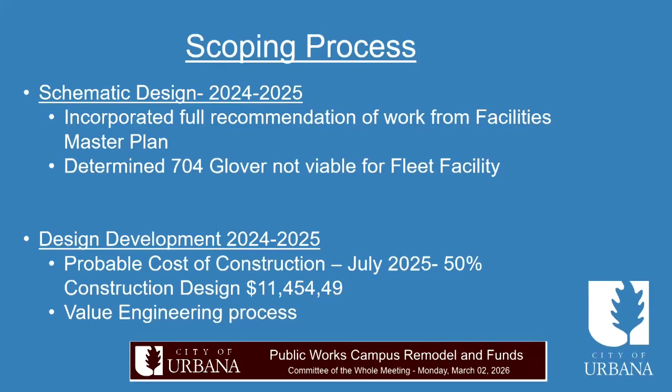So what's in the current scope of work in phase one is what we have funded and what we have released out for bid. This work includes a new fleet maintenance facility and a new operations vehicle and equipment bay, as well as addressing some critical deferred maintenance items that we're going to walk through here in a minute, and Troy's going to help me with that.

With that construction work done, it's set us in a position where we can come back and talk about funding the CIP in the capital improvement plan in the future, finding funding to move forward with additional recommendations, which include relocating the Arbor Division back to 704 Glover and the interior office spaces that I touched on earlier. Just to note, those will have to be part of future planning and budgeting discussions in the capital improvement plan when we come back.

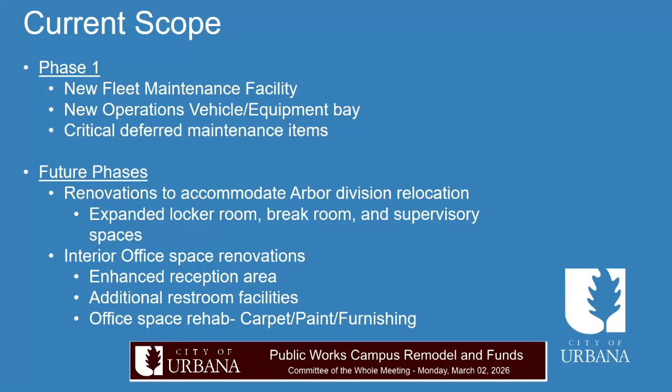So with that, I'm going to let Troy walk through the scope of work and what we plan to accomplish with the project.

Hi, thanks for having me. This is going to be an interesting approach to how we're going to do this since it's an existing facility.

You've got two halves there. The first three bays are the operations department, and the next four are the mechanics working area. It's going to be quite a bit larger than where we're at now. It's going to actually expand into our parking area for our employees, which is going to cause a little switch around in the way we have things laid out right now. But this is an overall plan.

Everything on the right-hand side shows the 4 bays for fleet. You've got 2 drive-throughs so they can pull fire engines and some of the bigger vehicles straight through. There's a couple of smaller bays for fleet vehicles that they can pull in with lifts.

They've got some work area in the center there for fabricating and tool benches. Basically, it's going to be a really good process for them to work on vehicles, pull things in, raise them all the way up with the wireless lifts that we have, and get the job done without being off-site. Right now we're kind of scattered between two buildings due to space needs, so we're trying to get everybody under one house so their tools and equipment, all the work gets done in a timely and efficient manner.

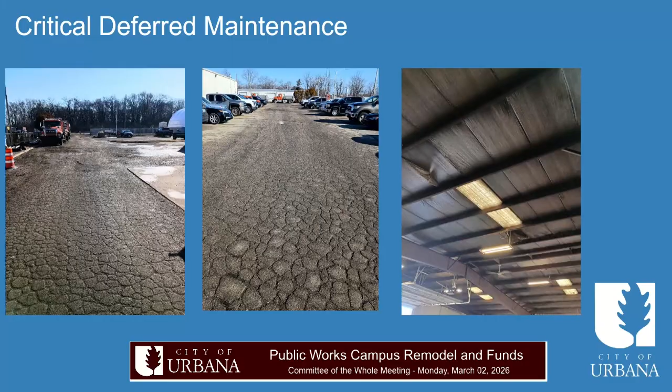The picture on the right shows the current structure that we're going to demolish, and you can see how the roof and insulation is saturated and leaking. It's just years of wear and tear and the deferred maintenance we were talking about earlier. We can't keep deferring that - we need to replace it.

That roof leaks, we've got interior problems with water getting in. It's just deferred maintenance we need to get done, so adding that to this project seemed very proactive - getting out in front of things we need to do anyhow.

We can't use it again - the new facility is just too big. We have to replace it.

One of the things this new facility is going to be equipped for is solar. So while that's not in the plan, our environmental manager is working with me to make sure the new setup will be equipped to have enough solar on it to power the entire facility. We're excited about that, but we still need a generator just in case the sun doesn't come up tomorrow.

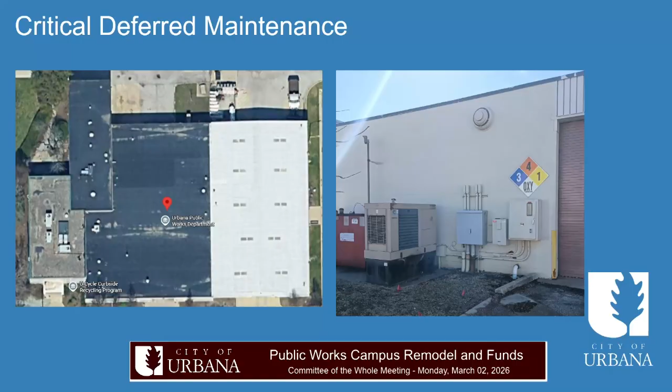So where we're at today - we released the scope of work I discussed in phase one for invitation to bid. In February we had five local contractors bid the job. The low bid started at $6.255 million, and the high bid was $7,080,000. On a project of this size and scope, we were pretty pleased with that tight grouping of bid pricing - it lets us know the plans were understandable, clear, and concise.

So we've reviewed the low apparent bidder, and it appears everything is in order. We're looking forward to executing a contract with them, hopefully within the next 30 to 60 days, but sooner rather than later.

The metal steel structure is kind of the limiting factor in that. The sooner we can get the contract awarded and get them certainty, they can get that pre-engineered steel metal building ordered and in the queue so we can meet our construction deadlines. With that, we're hopeful we could start as soon as mid to end of April, if we can get our contract awarded within the next two weeks.

Speaking to the budgetary considerations, as I mentioned, we had $6.5 million budgeted for construction in the capital replacement and improvement plan. With a base bid of $6.255 million, we've also added a $70,000 earmark for furnishings and fixtures - office furniture for the 2 new offices in the fleet space, hose reels, 2 air compressors, that sort of equipment. We've got itemized and listed for that.

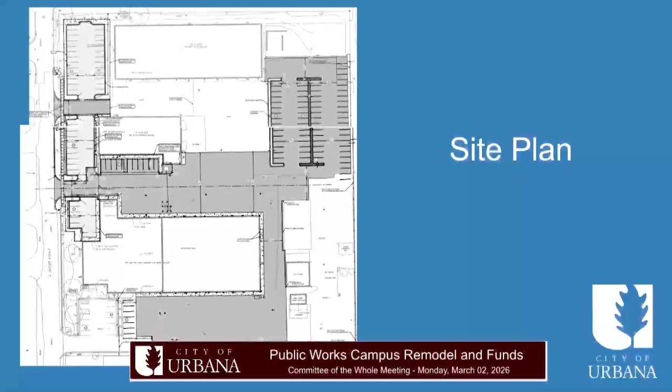Now we'll be able to park a truck in one specific location and still be able to use the remainder of the area, pulling vehicles in and out.

Okay, I just wanted to understand. I don't read these little schematics very well, so I wanted to understand—it's a lot of information in a small picture. Oh, yeah, glad to help. Okay, thank you.

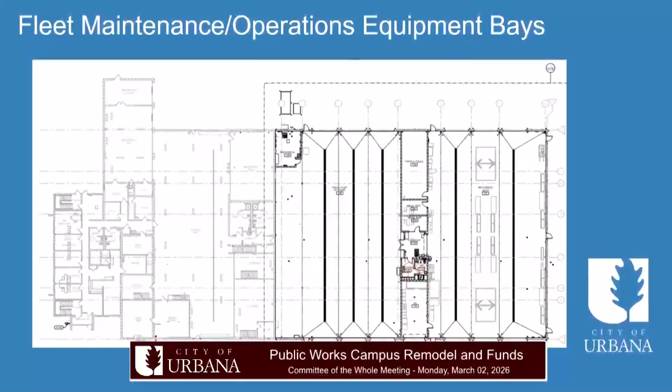All right, any other questions? Okay, I have a couple. Sure, I've been taking notes here.

So I think I heard you say that the addition of the bays is an additional 20,000 square feet. Is that correct? The entire new pre-engineered steel structure is 20,000 square feet.

And you mentioned that when it was scoped out again, it was about 11.5 million, roughly speaking. So is it safe to say it's another 6.5 million to do the other items not on that list? I'm wondering if there's a breakout, say for the Arbor Division, how much that would cost. It would be handy for us to know that breakdown.

Sure, absolutely. We could probably put that together and send what the original schematic design was and pull out those parts and pieces that aren't in phase one. But I would probably say from 6.2 to 11, probably another $4 to $5 million, which would be recaptured once fleet's completely out and in the new facility.

This area I'm outlining is a fleet bay and oil storage. We have a design to reconfigure a new break room area to accommodate all the new employees with new changing areas here, and upgrading our supervisor office area here.

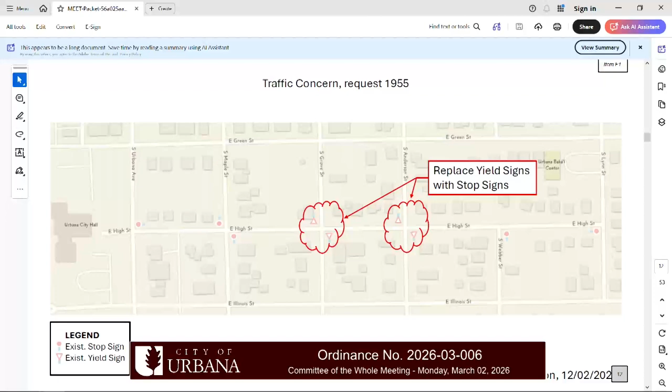Okay, other questions? I have a question. I'm quite familiar, I've lived on that street for many years. I don't anymore.

But are there other intersections in Urbana that have yield signs? There might be. John thought there were some in another neighborhood in Urbana, but we're not sure. These haven't been reported to us by our signs expert at Public Works. Recently, we made him aware that if he encounters any yield signs that need to be replaced, to bring those to engineering so that we can evaluate them to see if they would actually be better suited to have a stop sign in those areas. But I'm not aware of other yield signs, yeah.

Okay, so to the best of our knowledge, these are the only remaining yield signs in Urbana. Correct, to the best of my knowledge. Okay, all right. With that, I would entertain a motion.

Okay, I'll do it. I move that ordinance number 2026-03006, an ordinance amending Schedule H of Section 23-93 of Urbana Local Traffic Code requiring stop signs at certain intersections, Grove Street and Anderson Street at High, be moved to City Council.

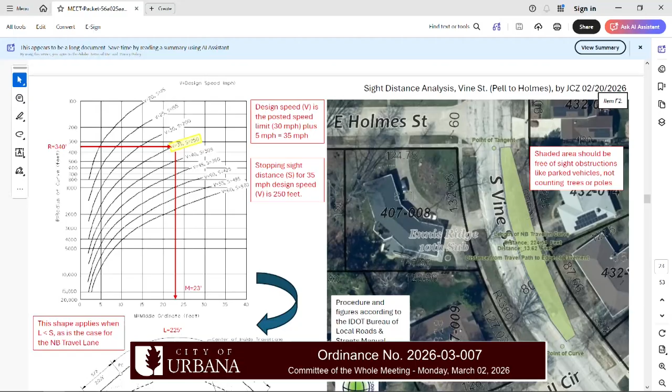So this is our curve for 35 miles per hour design speed of a road. We go on the vertical axis where our radius is at 340 and come over to our spot here, which brings us down to the horizontal axis, gives us a distance here, a middle ordinate distance in feet of 23 feet. And what this means is that we need to have 23 feet distance of clear space, so with no obstructions for sight, from the center of the travel lane to the shoulder edge.

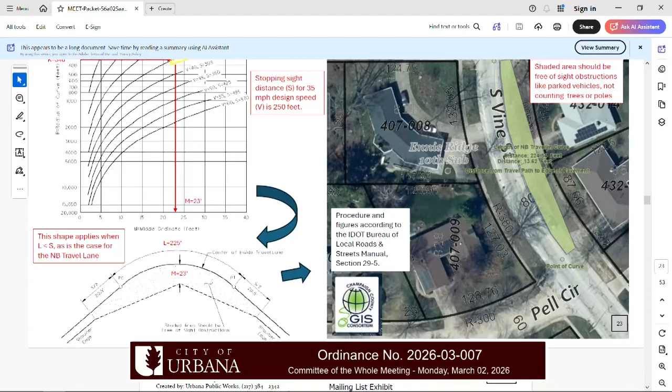Correct me if I get any of this wrong. The center of the travel lane is this line right here that I'm pointing at, and then the shoulder edge is here. So this translates to the width that John has drawn out here on our diagram. So this is the center of the travel lane, this line right here, and that length was determined on our curve to be 225 feet.

And that was used to dictate which graph was used in the manual. So that's why John noted this L less than S, L being the 225, S, the sight distance for this speed is 250. That's determined up here in our graph. Anyway, that's just to say that's why he used this specific graphic that's given in the manual.

So this tells you that we need to have this width here be at least 23 feet of clear distance. And in our case, it's measured to be about 14 feet here from the center of travel lane to the shoulder edge. So he drew out what the 23 feet would look like to show that this should be free of sight obstructions like parked vehicles, but not considering the trees or poles in the area.

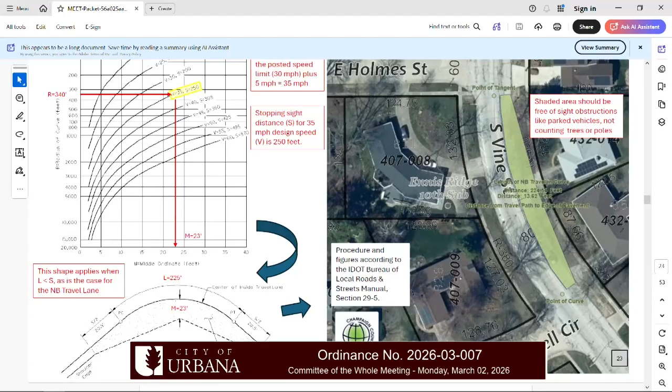Okay, so that is why this is proposed to add no parking to this zone right here from Holmes down to Pell Circle on the east side of the street.

Prohibiting the on-street parking on the east side of Vine Street from Holmes to George Huff is recommended to provide continuity in this area so we wouldn't have a gap in the no parking zone from this curved part of the street up to this area that's already signed as no parking.

And because this is a narrower portion of the street, 30 feet versus 40 feet, if we did allow parking on both sides, it would be very narrow traffic travel lanes.

Finally, going into community impact. So there was a traffic commission meeting on December 2nd. After that meeting, John mailed the owners and residents of the properties adjacent to Vine Street from Pell Circle to George Huff Drive to notify them of the proposed on-street parking regulation and ask for their input. So the packet includes that notification letter and the map of the properties that were notified. And comments were received from a few residents before January 26th, and that input is also provided here.

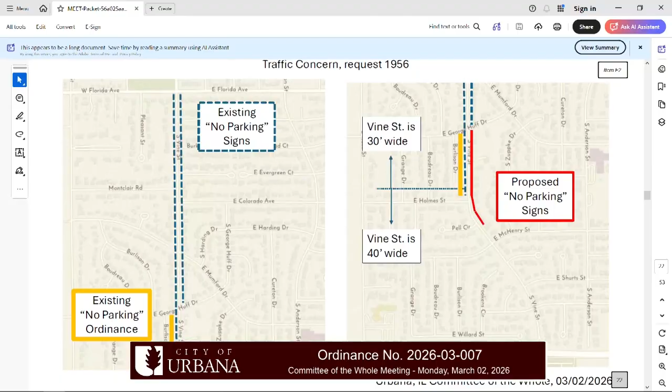On January 26th, John worked with the police department to move forward with this recommendation to install the no parking signs as a temporary measure on the east side of Vine Street from Pell Circle to George Huff Drive. Like I mentioned earlier, these were installed on February 19th. Prior to that, on January 28th, John mailed the same property owners and residents to notify them of the new no parking signs that would be installed as a temporary regulation and ask for their input.

And as of February 20th, Public Works received more input from the same residents, and that input was included in your packet as well.

So finally, while this recommendation is not based on any crash analysis, the history of crashes in the area did not dictate this recommendation. It's intended really to reduce the risk of crashes.

It should also be noted that Vine Street is classified as a local street, but it can be considered a high-volume local street with more than 1,000 vehicles per day. So this is John's statement here: In my opinion, the higher volume of traffic is a good reason to reduce the traffic safety risks, and the potential safety benefit is worth the cost of inconveniencing the residents by removing the on-street parking in this location.

Did I miss anything? I think I can take your questions now. All right, questions. Chandra, we'll start with you.

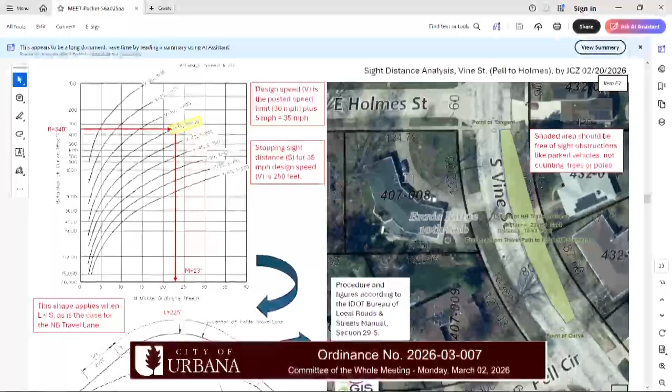So I said, having lived in this since 2000, there have been 5 automobile accidents and 1 motorcycle accident where people failed to make that turn and ended up either in my neighbor across the street's house, my neighbor next door's yard, or the tree for one of the houses just down the street. I don't have the traffic records, but I can tell you the exact 6 times I was around when there was an accident at that location.

So I asked John about that curve, whether with that hash mark on there, it should have no parking posted for that too, on the outside, on the west side. That's where my feedback went into this.

The Traffic Commission looked at this. They agreed with my assessment about the narrow part of the street, that it should be consistent—that's the stuff north of Holmes, essentially 200 feet north of Holmes. But in looking at it with a professional's eye, and how roads are supposed to be designed, they came up with this additional need to do no parking on that curve as well, for that reason.

I received feedback from a couple of people, including the resident who's here, and a resident who is right in the middle of that green blob there, asking if that no parking could not be put in for that curve. That resident has a very specific reason why they have people park at their house.

So I followed up with John and said my concern was only about the place where it's 30 feet instead of 40 feet—if there's a way to leave off the part about the turn on Pell Circle, please do so. He came back to me and gave me all the nitty-gritty details of why, in his professional opinion and the Traffic Commission's opinion, it should be that way. And I said, I can't tell you how to do that part of your job.

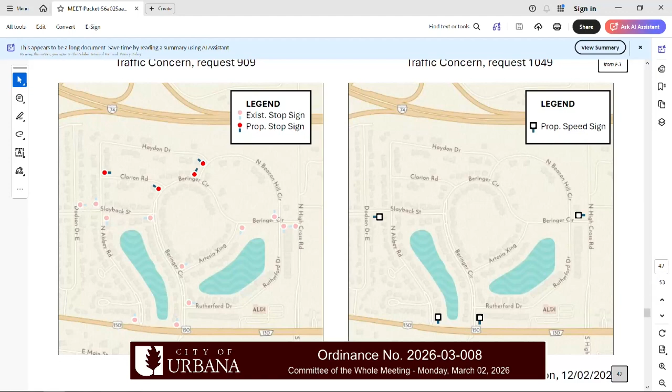Any questions on this one? Let's start with Chandra. Do you have any questions? No, thank you. Any other questions? All right, with that, I would entertain a motion.

I will move for ordinance number 2026-03-008, an ordinance amending Schedule H of Section 2393 of the Urbana Local Traffic Code requiring stop signs at certain intersections, 4 intersections in Beringer Commons subdivision, be moved to a consent agenda for approval of City Council.

Do I have a second? Second. Moved by Sharice, seconded by James. Any discussion? Seeing none, all those in favor, please say aye. Aye. All those opposed? That moves forward on the consent agenda.

Next up is resolution number 2026-03009R, a resolution authorizing the mayor to execute a right-of-way dedication for North Lincoln Avenue along the frontage of 1407 North Lincoln Avenue, former fire station number 3.

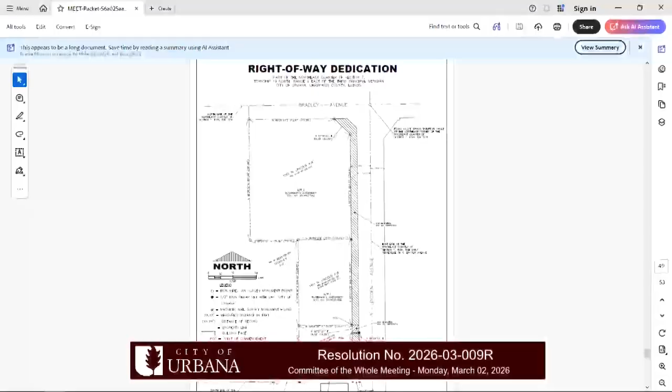We are proposing to clean up the right-of-way in front of that. This resolution would approve the right-of-way dedication at 1407 North Lincoln Avenue.

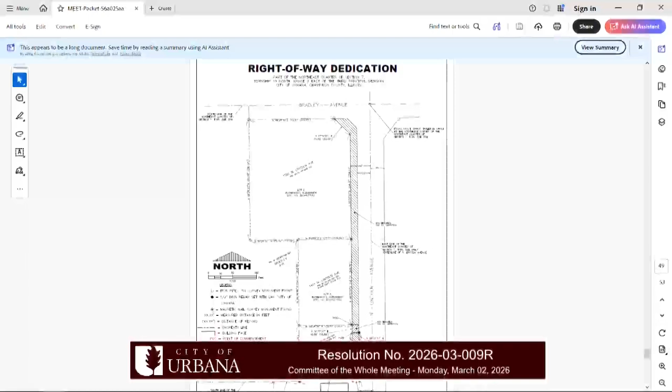Questions? Chris: when you say do something, we're talking about demolishing that building and building a grocery store there, right? Yeah, I believe that's the intended future use for that site. Chandra, do you have any questions?

I guess I'm trying to understand what dedication means. So in this case, and we can see where this has been done in previous years, the existing property lines extend out to include this hatched area where we're showing proposed right-of-way dedication. So what this would do would effectively take that space that's hatched right there and make it right-of-way. It would no longer be part of that parcel. The city would own it moving forward and have control over that space. I get it, thank you.

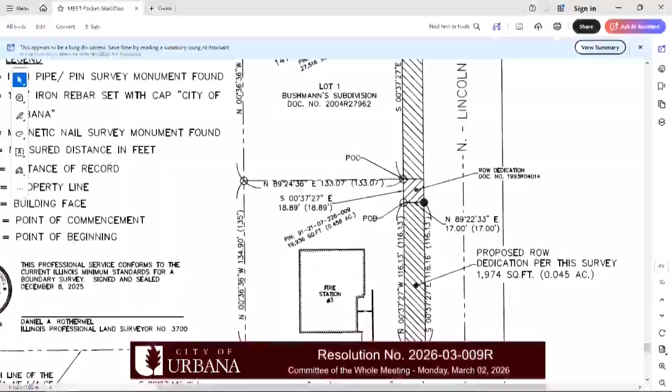Any other questions? All right, I'll entertain a motion. I will, since this is in my ward, move for resolution number 2026-03-009R, a resolution authorizing the mayor to execute a right-of-way dedication, North Lincoln Avenue along the frontage of 1407 North Lincoln Avenue, former fire station number 3, to consent agenda for approval to the city council. I'll second. Moved by Sharice and seconded by Chris.

Discussion? All right, all those in favor, please say aye. Aye. All those opposed? All right, that moves forward.

Last on our list is resolution number 2026-03010R, a resolution for improvement under the Illinois Highway Code for the state motor fuel tax for Windsor Road from Philo to High Cross. As if it doesn't get more exciting than right-of-way dedication, this is a resolution that would approve spending from 2007. This is part of our IDOT MFT audit.

It was found that there was a little under $8,000 that was spent from the city's MFT fund that was not approved through a resolution at the time and therefore allocated or obligated from our MFT funds. We had the money, we spent the money, we didn't go through the proper formalities at the time to do so. But fortunately, we can still do that now retroactively. So this is a resolution similar to what we now bring you for future projects to approve the spending of those MFT dollars.